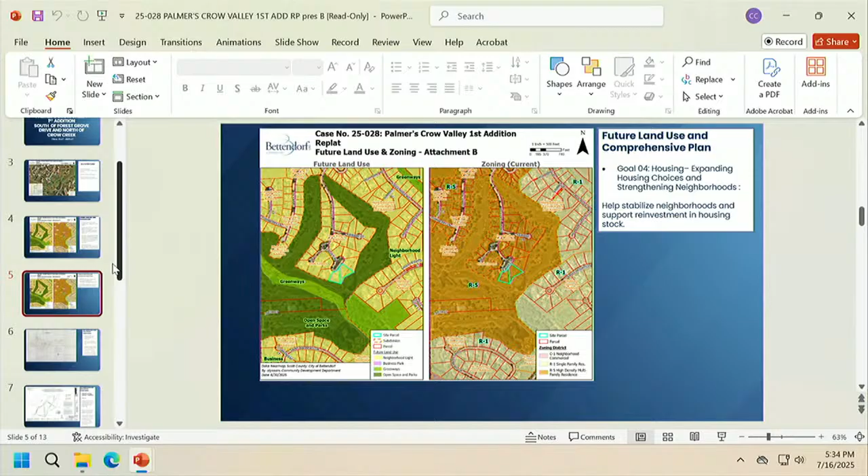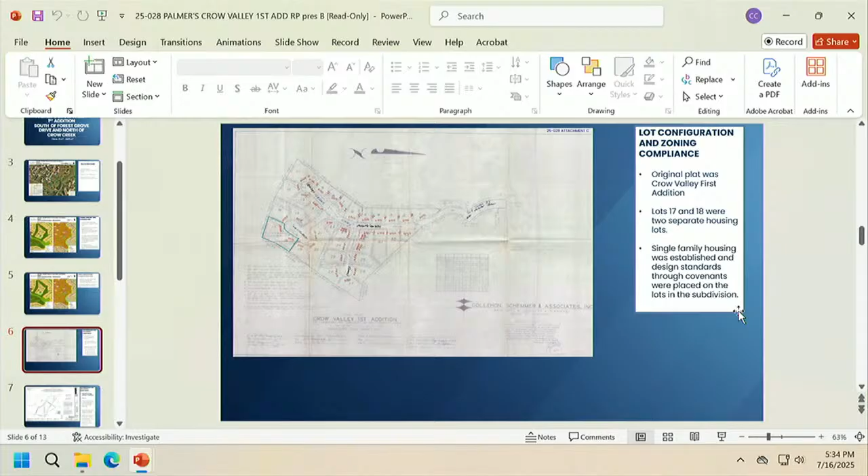We have a Goal 04 here being met by looking at the comprehensive plan, and that is to expand housing choices and strengthen neighborhoods by helping stabilize neighborhoods and support reinvestment in housing stock. The area that was involved was originally a part of Crow Valley First Addition. Lots 17 and 18 were 2 separate single-family housing lots. Lot 18 does not contain any housing. Currently, lot 17 does contain a house, and that house will be removed. It will be torn down in order to accommodate one house that will fit on Palmer's Crow Valley First Addition.

So what you're seeing right here is a utility easement that essentially runs down the middle here where there is a boundary presently, between lot 17 and lot 18. That easement is coming out as well as that boundary. The 2 lots combined equal 1.45 acres. There is no problem with the acreage being way over the size required at 10,000 square feet. The residence at 2455 Eagle Circle will be torn down as part of this process, and a new structure is proposed.

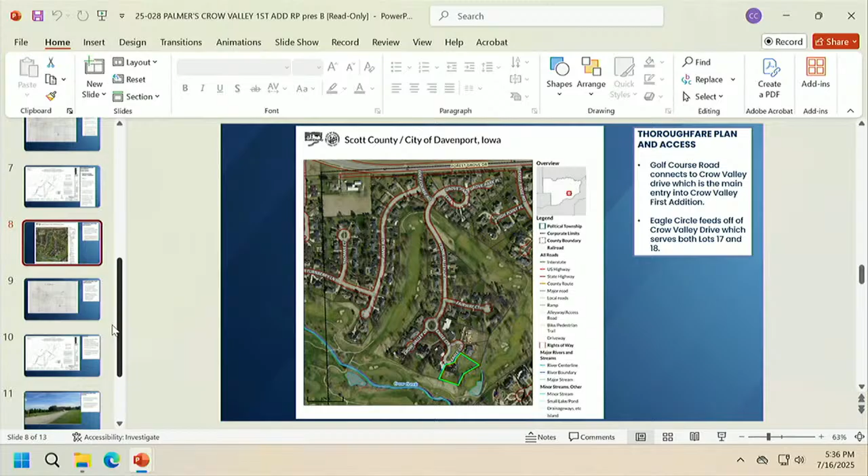Thoroughfare plan and access: essentially you have access off of Forest Grove Drive through Golf Course Road, and that connects to Crow Valley Drive, which comes down here to Eagle Circle. The roadway is what it is, it was not improved with curb and gutter in the day. It is not going to change during the replatting process, and there will be no other infrastructural improvements being added to the site. Currently, the utilities are found throughout here, mainly sewer running through the area, and those will be maintained, and other utilities are already joined to the site, so there won't need to be a provision for additional utility easements.

There are no sidewalks placed along here. That was part of, I believe, the design that was originally proposed back in the day. There is a recreational trail, though, as you go up, that does connect to Crow Valley Drive, which comes down here. And this is the residence in question that will be removed, and this is the one lot that is currently vacant. This is lot 17, which is currently occupied.

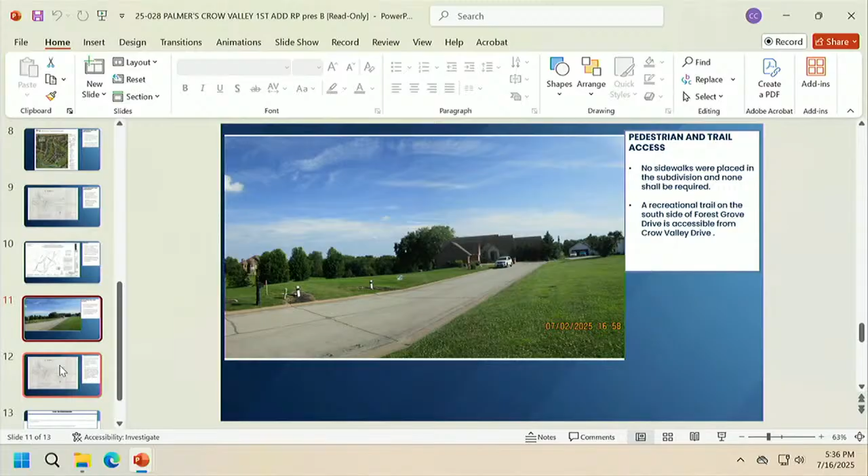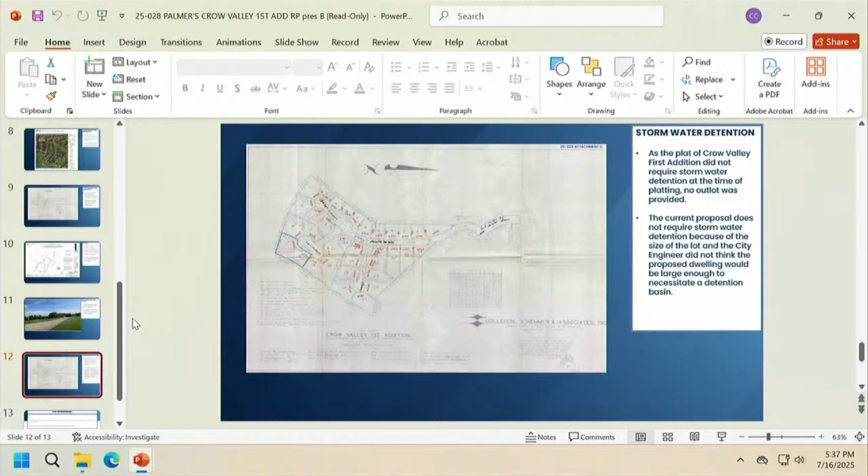There is no stormwater detention required. It's grandfathered in. Also, our engineers determined that the house that would be built on this 1.45 acre lot does not meet the criteria for requiring stormwater detention.

Staff recommends approval of the final plat because it meets the goals and plan organization segment of the comprehensive plan, Goal 4, as we explained earlier in the presentation. Staff recommends approval. Are there any questions?

Thank you, Greg. Appreciate it. Mark, anything since publication and presentation? No. Okay. Questions and comments regarding this case from the commission, please?

I do have one, just clarification, Greg. The utility easement that's being abandoned on the lot line, so that existed for the purpose of 2 houses being there? Yes, and since there's only going to be one, then it's perfectly fine to abandon it. All right, thank you.

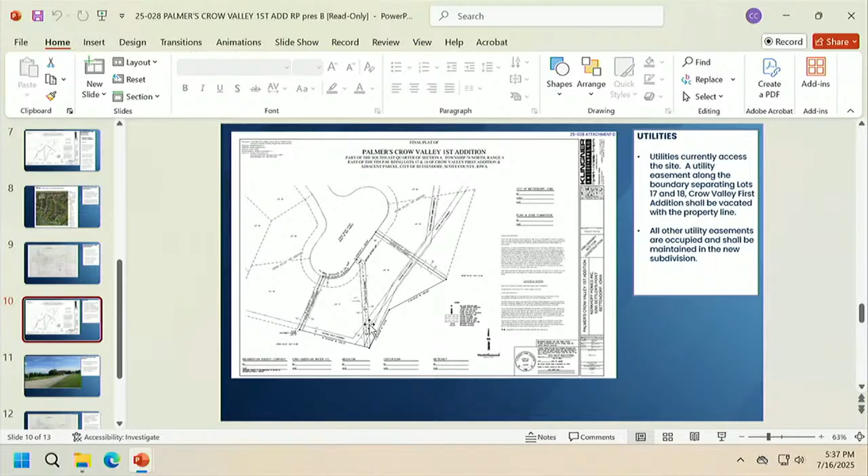Any others with the commission? Anyone in the audience with regard to this matter? You guys are way too easy tonight. All right, we'll come back to the commission.

Chair, I do have a question, not specific to this case but more for Mark, down the road when there's a proposal for a house structure. Just for my education and maybe the public's, what is in the regulations to promote a structure that is as environmentally friendly as possible? Many cities and states have begun to have guidelines that leverage sun, maybe the use of rainwater and whatnot, so that over time we build a more environmentally friendly structure that takes advantage of natural resources to limit requirements for energy.

Yeah, absolutely. We do adopt the current version, 2021, of the International Building Codes and International Energy Code, and those contain a lot of environmental improvements or benefits. Every year you're seeing those codes go up. I shouldn't say the current version, we're always 3 years back. 2024 is the newest version, we're always one cycle behind. Typically, you don't want to be on the bleeding edge, you want the code to get out there and let people understand it.

So any house built in Bettendorf will have to follow those codes, the energy code, the electrical code, and the international residential code. Those control a lot of the environmental features of the property and will help with energy savings and things like that. Thank you. All right, thanks.

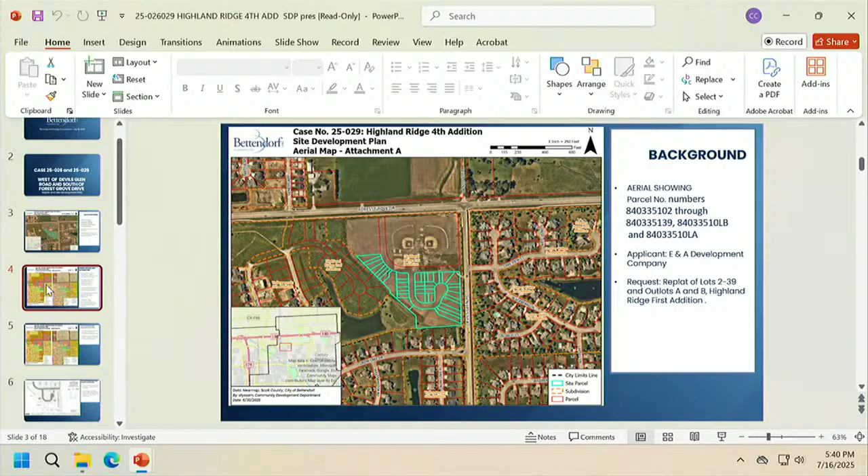There's a combination of different land uses within the area: service commercial, and also mixed transitional and neighborhood light. The perimeter surrounding land uses are neighborhood light and service commercial, mainly service commercial to the north and neighborhood light to the east, south, and west.

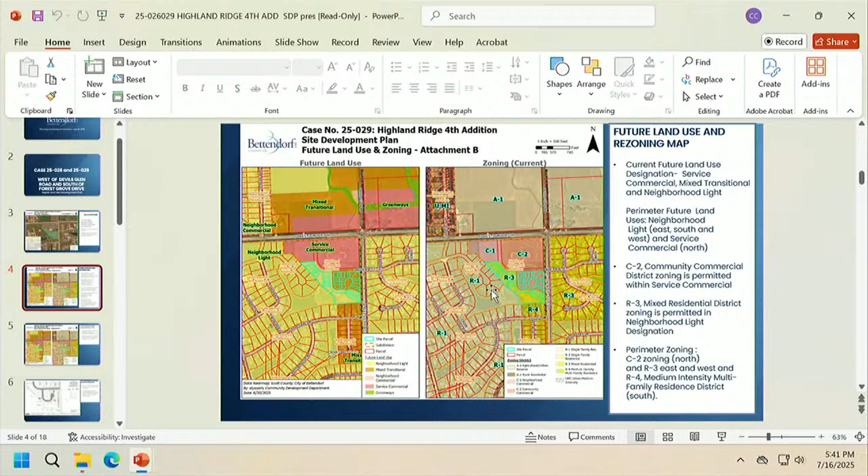It's divided between C2 Community Commercial District for zoning, permitted within the service commercial area, and R3 Mixed Residential District zoning in this combined arrangement. They have slightly different standards, but for the most part some standards are the same for the type of townhouse design being proposed. You've got R4 zoning to the south, C2 and C1 zoning to the north, R1 zoning to the west of the site, and across Devil's Glen Road, R3 zoning.

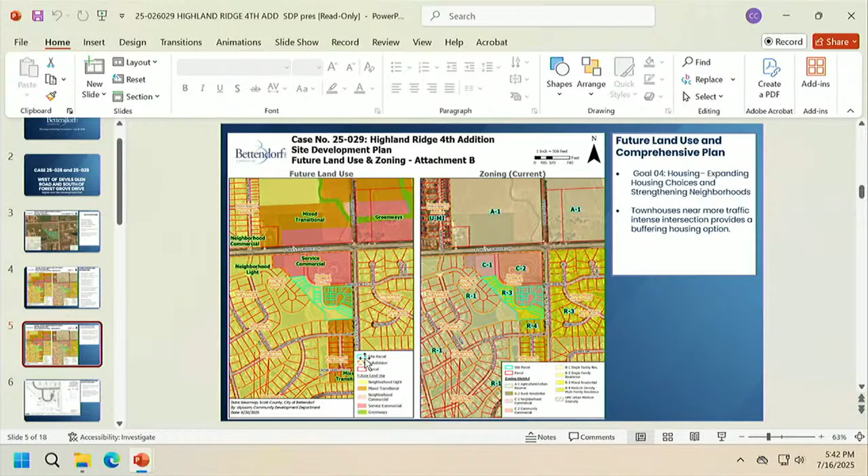Goal 4, meeting the housing goal in the comprehensive plan, looking to create more housing choices and strengthen neighborhoods, is what we're looking at. The townhouse proposal here is something you'd see as a buffering area, as you get closer to Forest Grove Drive and Devil's Glen Road, since this area is commercial and anticipated to be more commercial. So we've got buffering here, with more single-family uses further to the south and west, which is a natural progression one might see.

The differences between the first addition that was platted in Highland Ridge and the fourth addition as proposed is that we saw the addition of 3 more townhouse units and 3 more lots in this proposal than what we saw originally.

Essentially, what you have here is Highland Ridge First Addition. You have the exclusion of Lot 1 and then Lot 40, and Lot 40 is now Glen Grove Addition, lots 1 through 4. Those two are not being included in this subdivision process. The area outlined here is the area that is being replatted. You have 3 lots that were added.

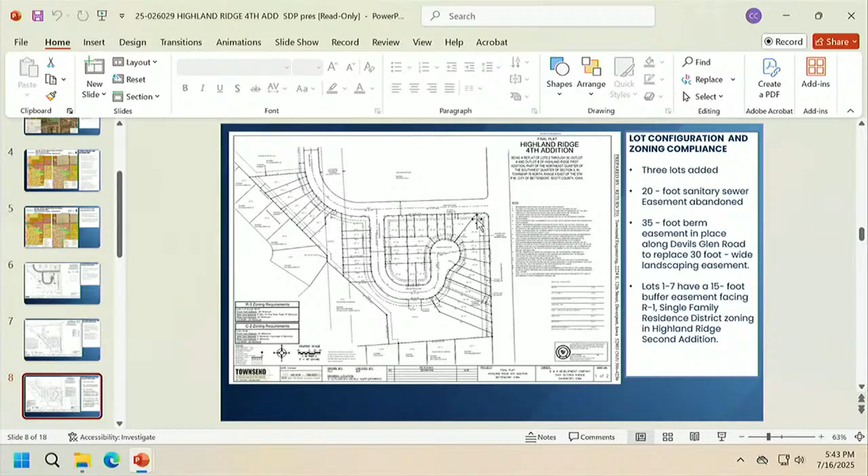You have a 20-foot wide sanitary sewer easement that is being vacated. You have the addition now of a 35-foot wide berm easement area, as opposed to what was originally a 30-foot wide landscaping easement along Devil's Glen Road.

Lots 1 through 7 have a buffer yard here that is 15 feet wide in easement, and that is for the R1 single family that is in this area, buffering against Highland Ridge Second Addition.

As we look at the lot configuration and the way this is laid out on the site plan, lots 1 through 14 and lots 39 through 41 are in the C2 zoned areas. Lots 15 through 38 are in the R3 zoned areas.

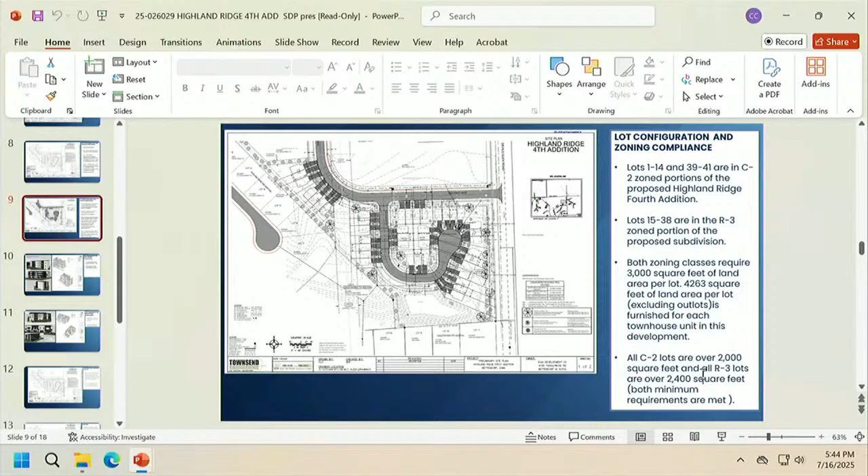There is a minimum of 3,000 square feet required for land area for each unit, true for both C2 and R3 zoning for each townhouse. The developers provided 4,263 square feet of land area, above the standard required. All lots in a C2 district must be at least 2,000 square feet for a townhouse, and 2,400 square feet for a townhouse in R3. Those standards have also been met by the petitioner.

There are 2 designs being proposed. One is a split level option for lots 8 through 34, with a footprint of 1,155 square feet for each townhouse. The second option is a 2-story walkout for lots 1 through 7 and lots 35 through 41, with a footprint of 1,380 square feet.

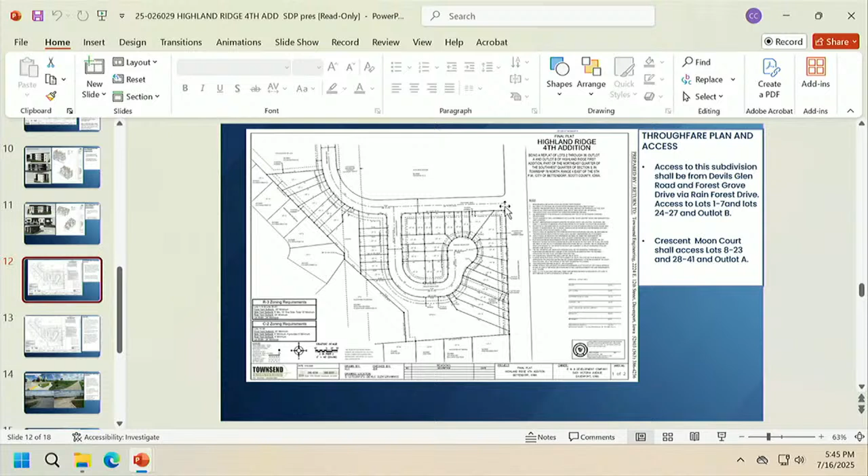Access to the subdivision shall be from Devil's Glen Road and from the north from Forest Grove Drive. Lots 1 through 7 and lots 24 through 27 shall be accessed from Rain Forest Drive. The remainder shall be accessed from Crescent Moon Court, that's lots 8 through 23 and 28 through 41, and Outlot A.

Utilities supplied: water supply shall come from the north side of Rain Forest Drive and follow the inner radius of the right-of-way, providing water service throughout. All hydrant locations shall be verified prior to City Council consideration of this site development plan.

Sanitary sewer lateral connections come from the south side of Rain Forest Drive, and they are placed along the outer edge of Crescent Moon Court.

As you can see here, the pedestrian and trail access, this is the southwest corner, so you're seeing the 10-foot wide trail here, and also I believe a 6-foot wide trail along Devil's Glen Road. There'll be 5-foot sidewalks that will be part of the interior of each of these.

This is the entryway from Forest Grove Drive right here. This is the entryway from Devil's Glen Road right here. In the interior, there shall be a requirement that those sidewalks be a minimum of 5 feet.

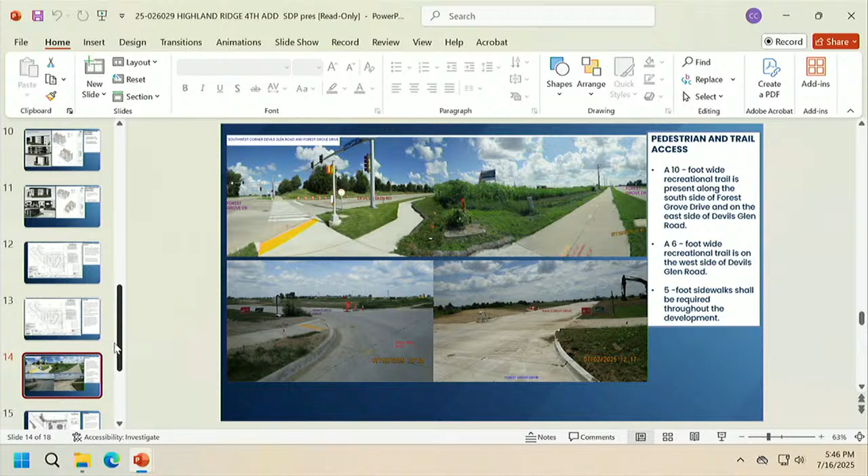Each unit shall have a 2-car garage for parking, and that's what the requirement is to be met. There can be additional parking to some extent within each of the driveways for the site. Stormwater detention is designed in Outlot A, the southernmost portion of the subdivision.

As we go to the landscaping and lighting, the tree factor required is 86. 57 tree factors are currently provided on the landscape plan, but we have been working with the engineer to get that count adjusted up to the required amount. Also, we need to see the caliper size and species of each tree.

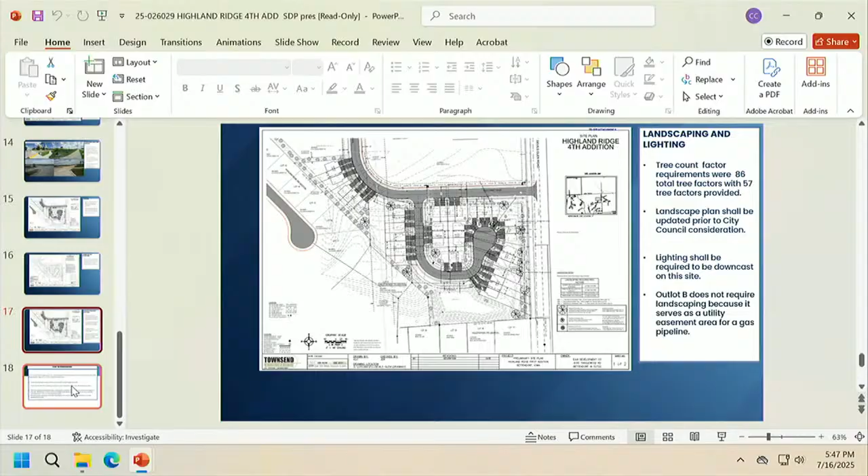Any lighting on site will be required to be downcast. Outlot B shall not be landscaped, as that is a utility easement that is 75 feet in width and contains a gas main. Staff, in looking at this, recommends the proposal because it does meet the goal for expanding housing choices and strengthening neighborhoods.

We would add 2 conditions regarding the landscape plan about the tree factors, species and caliper sizes being shown. We would also say that the site plan may not go forward until all fire hydrant locations have been verified prior to city council consideration. So, given that, staff recommends approval. I would ask, are there any questions?

All right, thank you, Greg, appreciate it. Mark, anything since publication or presentation? Nothing to add, Your Honor.

Okay, all right, questions and comments from the commission regarding this case? I have a question. Yes, ma'am.

Greg, we've looked at developments similar to this multiple times in the past, and we typically get to a question about parking. So you mentioned each unit has a 2-car garage, and how many cars can these driveways accommodate? Looking at the width, at least 1, I would say, for some of them, and up to 2 for others. For others, okay.

Will there be parking allowed on the street at the curve end where there aren't units? There'll be parking everywhere but the cul-de-sac. So the cul-de-sac, because of the density of the number of units, that's why you have the shared driveways there for snow storage. So there won't be any parking allowed in the bulb of the cul-de-sac. The rest of it there, not really any place to park anyway. So there is some curbside parking that would be available - there are some pretty long stretches there where you can get quite a few vehicles in. But no discussion about putting in parking slabs anywhere off street?

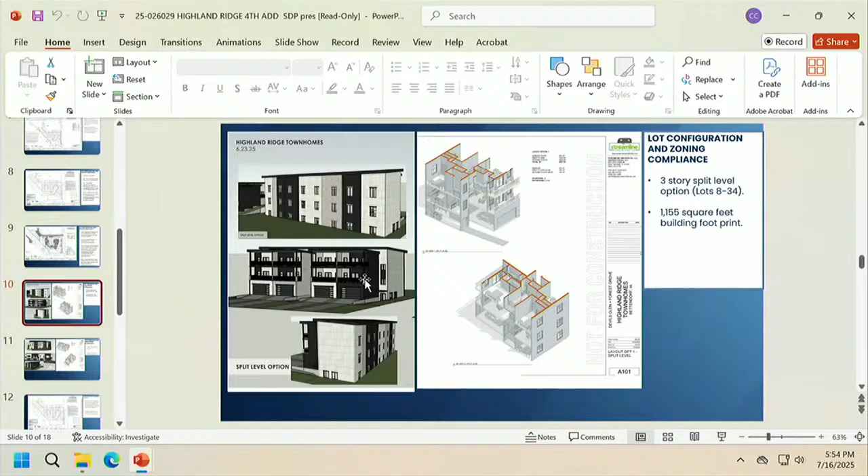Is that like a garden apartment or condo? We'll ask him. Split level has a different meaning than what I'm seeing here, but those are going to be essentially 3-story. The others are 2-story, where part of the opening with the garage is up top, and then there's an area where you walk out. That's the 2-story option. These here, I believe, are totally 3-story. I don't know where there's a split level per se. You're correct, the split level, if you look at the isometric view, is essentially a garden level, so you have a daylight window. Just not a full walkout.

Thank you. Rentals or owner occupied? No, they're all owner occupied, I believe, but we would have no control over that. That's just out of curiosity.

And anyone in the audience with regard to this case? I saw a movement, was that a fake out? We got you, we got you, Ben.

Yeah, so they will be owner occupied, at least that's the intent right now. For the split level, every level is going to split as it goes up, and it'll have that garden effect as you go in on that first level. Whether you're above the garage where they had the open decks, or on the backside, you have to walk up half a set of stairs to every level you're going to. The developer kind of liked this layout. We're still working with Streamline to button down exactly what it'll be, but we're going to be really close to what we provided there. On those trees, yeah, it's the easements and staying away from that detention, it's just a little bit of an issue there.